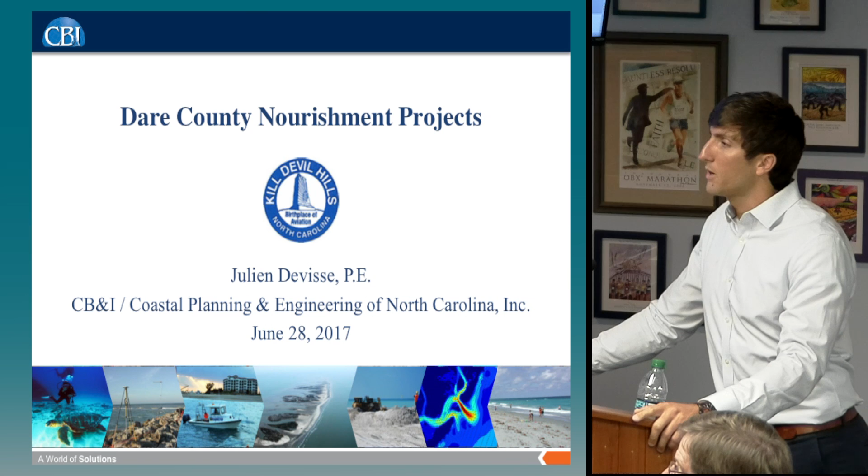Thank you, I'm glad to be here. Like Mayor Davey said, Great Lakes started pumping sand in Kill Devil Hills on the 22nd, last Thursday around 6 p.m., with the Liberty Island. Before they were in Duck, they had 3 dredges on site, or they still do. That's the Liberty, the larger one in Kill Devil Hills, and then there's 2 smaller dredges still working in Duck, and they should be done in Duck sometime this evening or tomorrow morning.

So we'll have those other 2 dredges at the south end of Kill Devil Hills near Landing Street as early as tomorrow morning. That'll be nice to see, and we'll touch on the schedule adjustment and what led to that. The main reason is because those 2 smaller dredges are here, so I'll have a couple slides to show to talk about that.

A little bit of background, like we're talking about now. We'll go over some of the background and equipment, look at the construction plans, the 4 subline locations for Kill Devil Hills, and a lot of those aerials we were just talking about, and then the schedule. Just a reminder of what to expect moving forward, monitoring, renourishment, and then some questions.

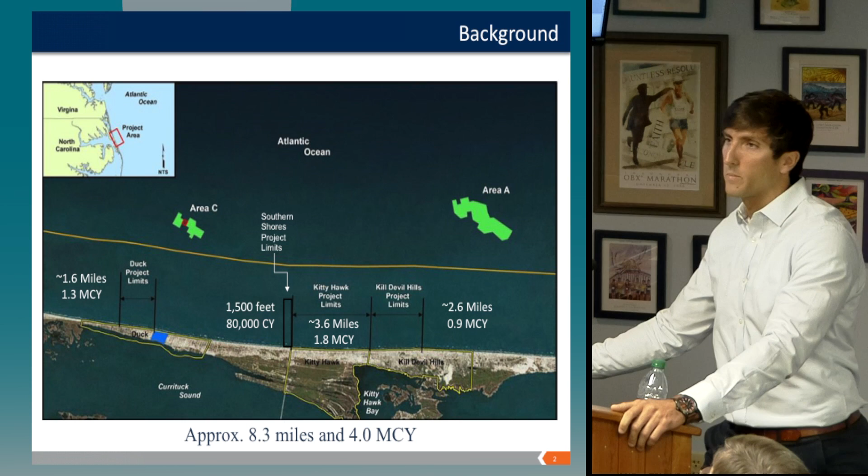So here's our project overview map. Those 2 green areas are our borrow areas. For Kill Devil Hills, it'll be coming from borrow area A, on the right of your screen. There are 4 towns; Southern Shores is included too now at 1,500 feet. So in total, we're about 8.3 miles and 4 million cubic yards.

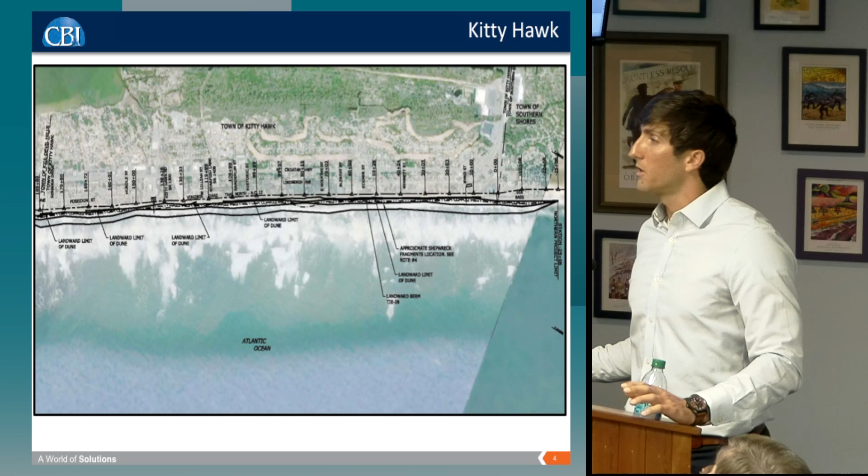There are 4 possible dredges that will be here. There are 3 on site right now. Like I said, the Liberty has started at Helga Street and is moving north. The Dodge and the Padre will be starting tomorrow, this evening, at Landing Street and heading south. And the Ellis Island may possibly show up later in the project, but that would be more for Kitty Hawk.

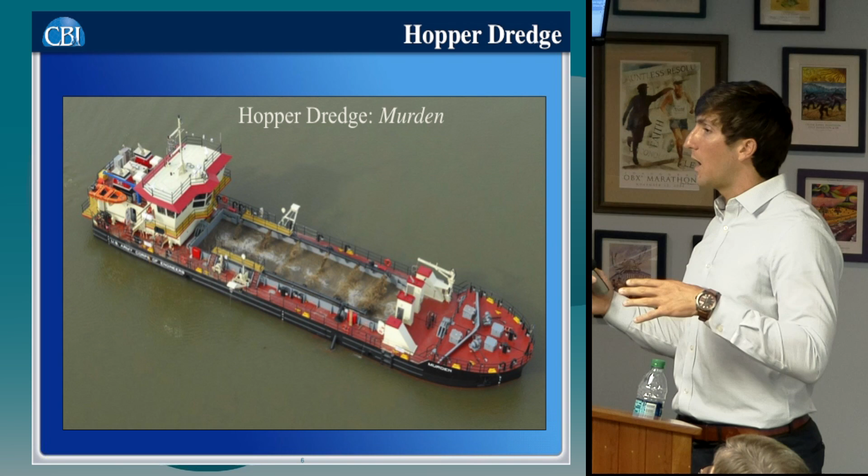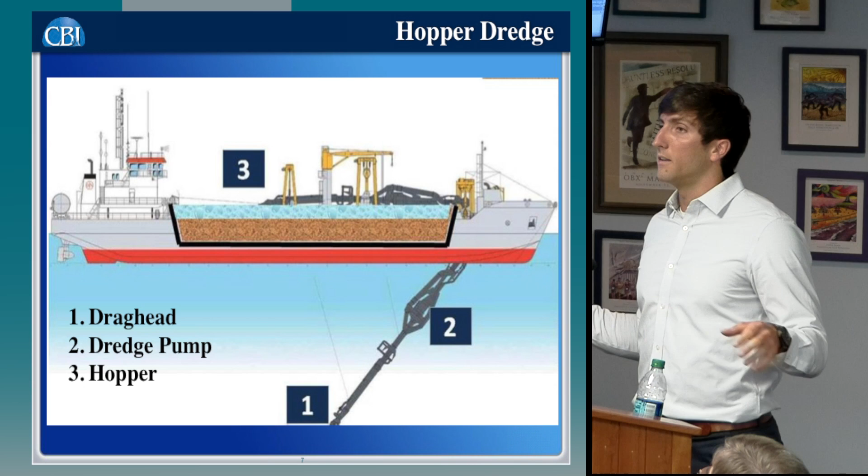This is a typical hopper dredge. This one's actually Army Corps, but you can see looking at the top how they're filling up their hopper. They go to the borrow area, fill up the dredge, and come back and discharge, and that's what you see offshore. This is your typical side view, with that material and water filling up the hopper. You have your drag heads on each side being dragged on the bottom, and those are kind of the vacuum cleaners that fill up that ship and then bring it back.

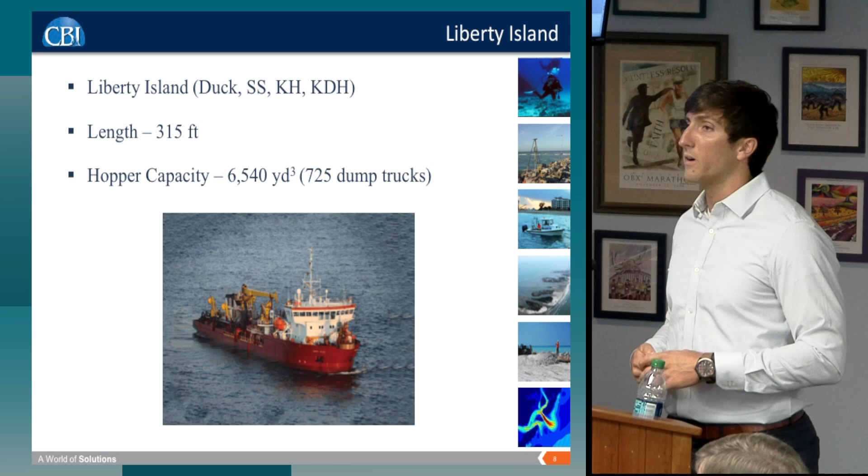This is the Liberty. It's larger than the Dodge and the Padre. It holds about 725 dump trucks worth of sand, whereas the 2 smaller dredges, the Dodge and the Padre, hold about 400. So they typically work in tandem. They're a little smaller, hold less, and keeping that distance down for them to travel is really important so that they're continuously pumping.

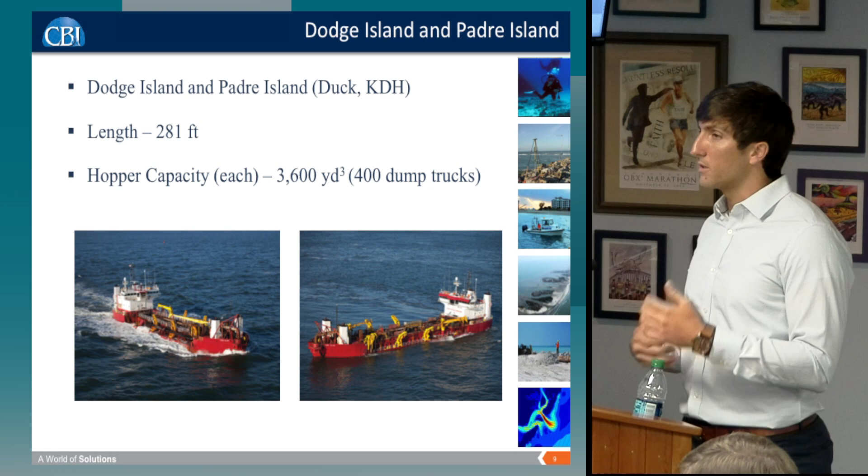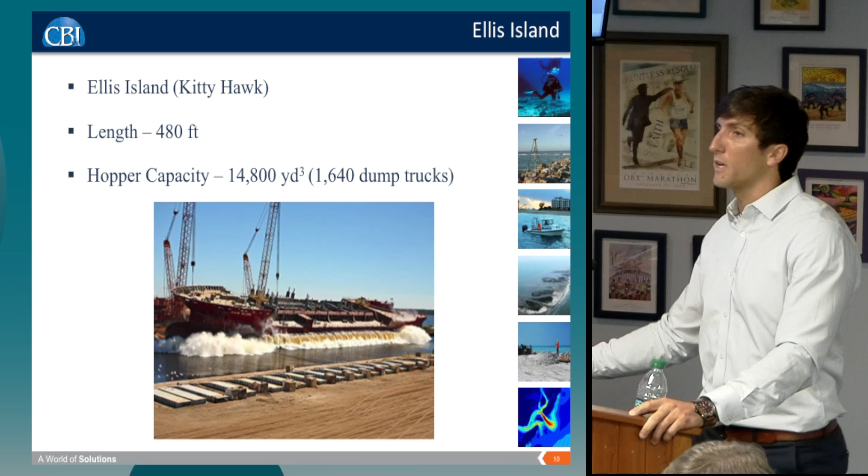This is the Ellis, which would be over 1,600 dump trucks, and that may come in August, but that would mostly be for Kitty Hawk at this point. It was supposed to be working on Kill Devil Hills, but because of that schedule shift, it'll now be more for Kitty Hawk if it does come.

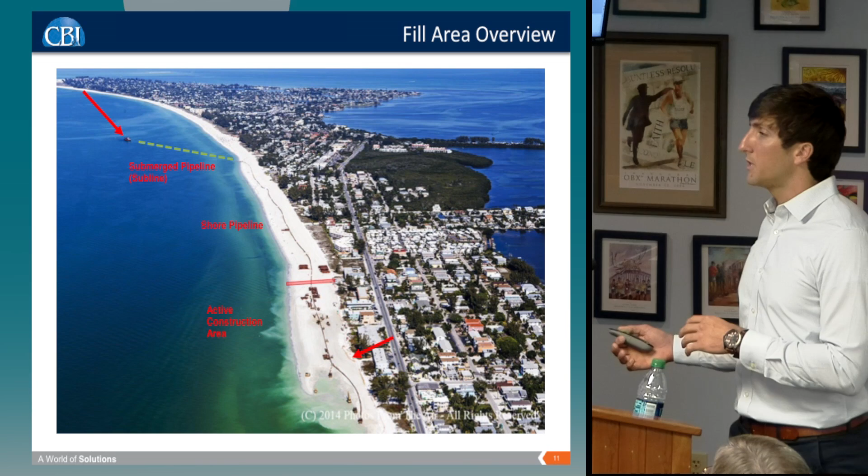This is typical of what we see, more of a generic view. That red arrow at the top left, that's the pump out station. You'll see the dredge just offshore, that's what it hooks up to. There's a subline, a submerged pipeline that leads to your shore pipe, which runs down the beach, and then you get into your active construction area.

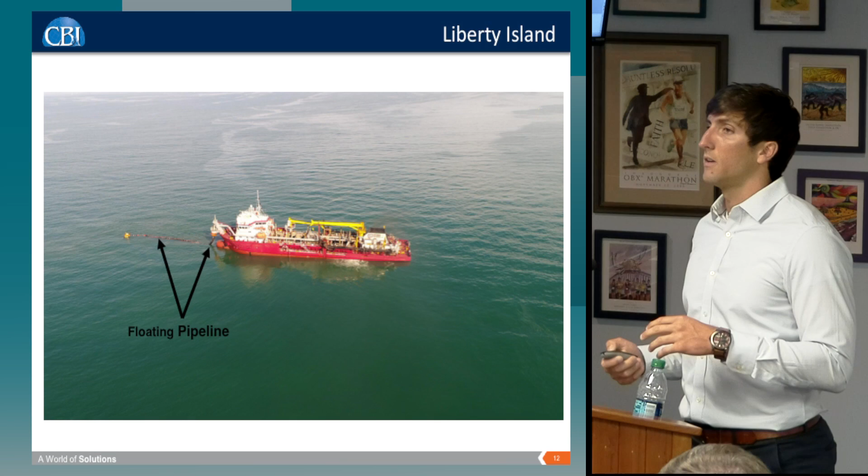So those were more generic. This is photos from Duck here. You have Liberty Island hooking up to your floating pipeline out there, about 3,000 to 5,000 feet from the shore, and that connects to the submerged pipeline, which comes onshore, which we'll see here. This is a view just looking from the beach; you have the dredge in the background, your submerged pipeline coming onshore.

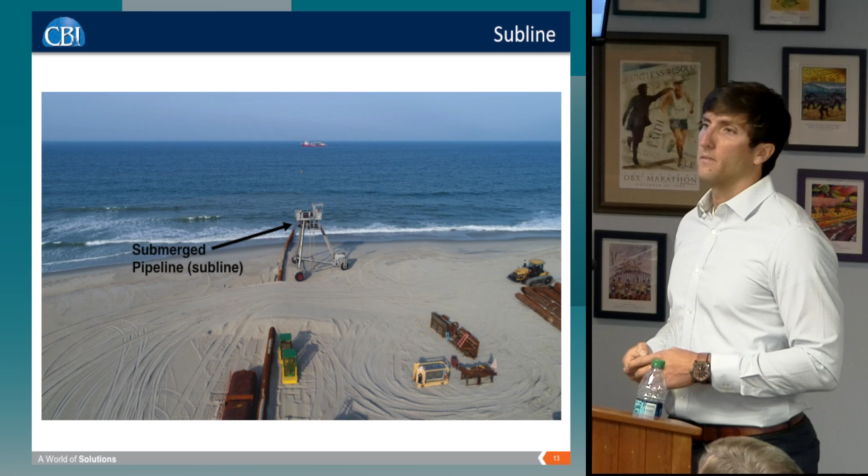I lost the clicker. Okay, because people are playing. Let me try again. All right, I think it started over.

There we go. And so then we get into our active construction area. I know that's a little small.

So our submerged pipeline comes onshore, then you have your shore pipeline, which is just the 30-foot sections of pipeline on the beach. And then you have a Y valve, where you split those shore pipelines so you can discharge from multiple areas as you go down the beach. You also have sand fencing on both sides, and that's the area closed to the public, the active area they're pumping into at that time.

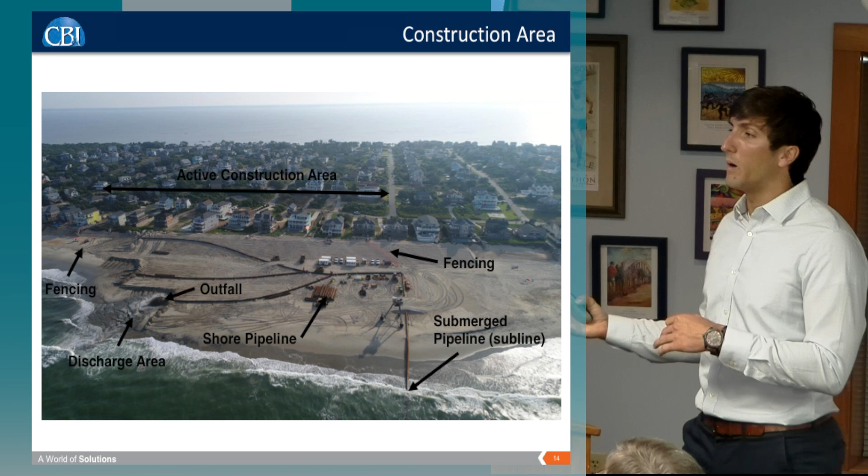Then they'll break down that shore pipeline, and once it's broken down, that Y valve will be moved up the beach, so now they have one line and can move the fence and reopen the beach. They'll keep moving down the beach until they hit a certain distance they can't pump anymore, and then they'll swap and head the other way.

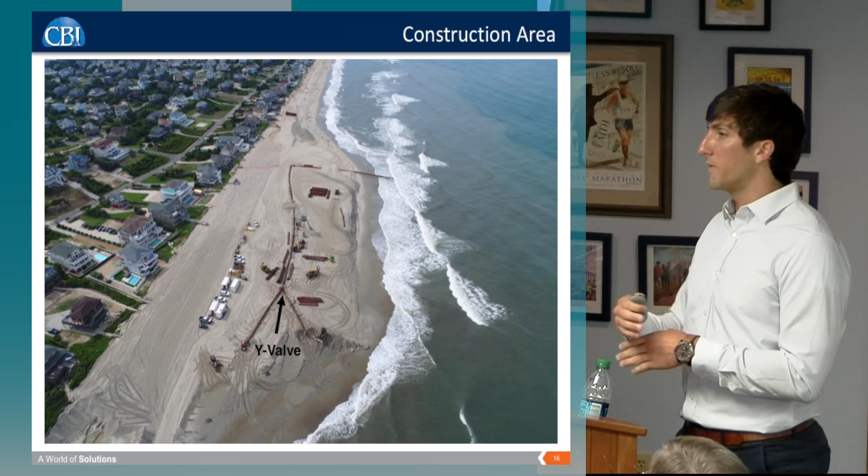So like at Helga Street right now, they're moving north into Kitty Hawk. Once they hit a certain distance that becomes inefficient, they'll go ahead and swap and start heading south from Helga Street.

Looking at the plans, just want to quickly touch on them. It runs from Prospect Drive to the Kitty Hawk, Kill Devil Hills line. What those plans show is we have a dune, our landward and seaward berm crest, and then where that template ties in.

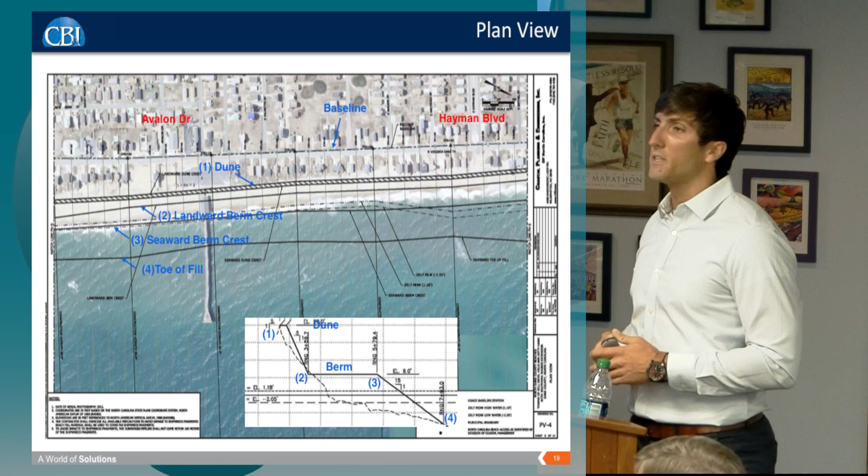And so you have your plan view at the top with this cross section - might be a little small to see, but that hatched area on the plan view is just the overhead view, that's the dune, and those other lines correspond to the cross section: the landward berm, the seaward berm, and then the toe of fill.

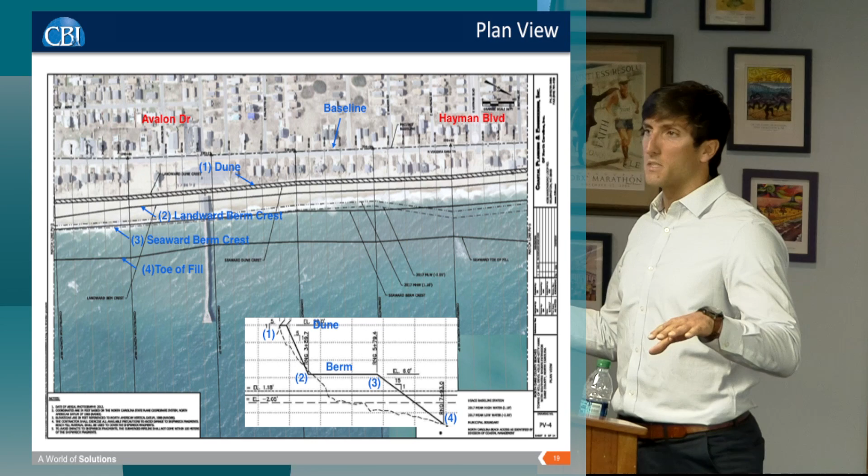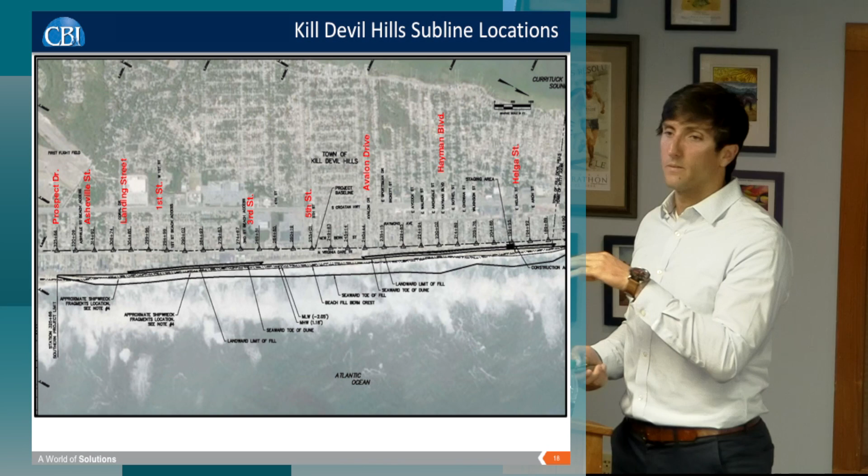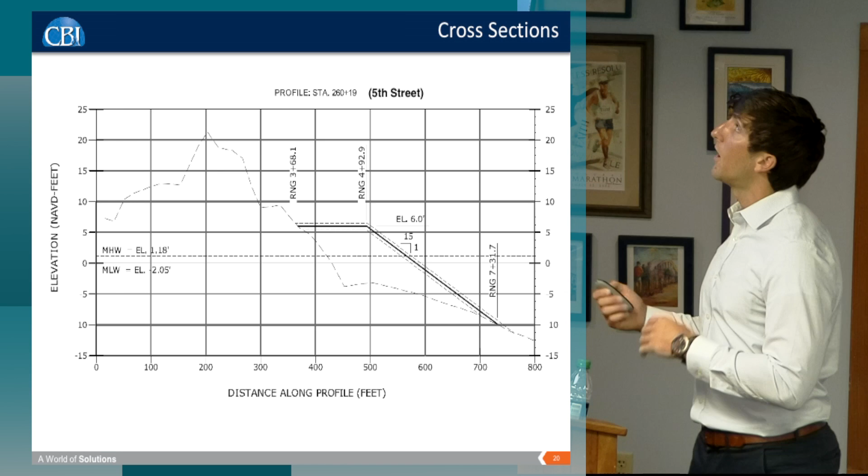And then in other areas, like between Landing and First, this is a 15-foot dune - the other one was 20 - and about 20 to 25 feet wide, compared to the other being 100 feet wide. So here it was important to build out that dune, and also the berm as well. That's why some areas do not have a dune - it just depends on the existing conditions and what was there before the project.

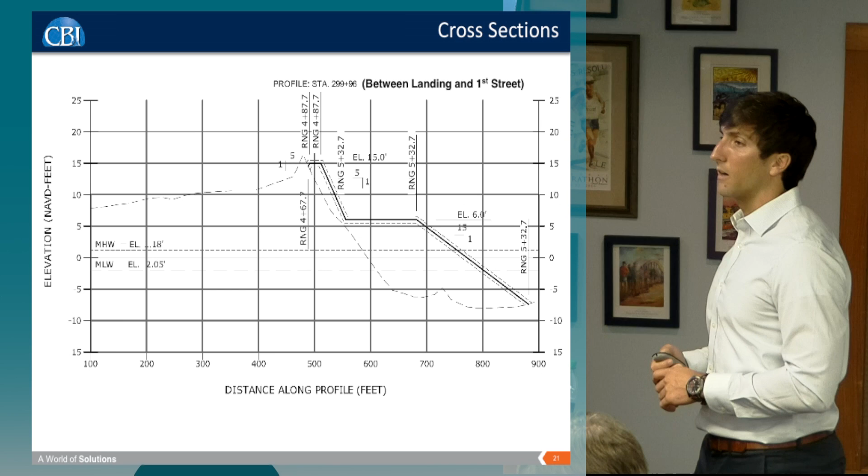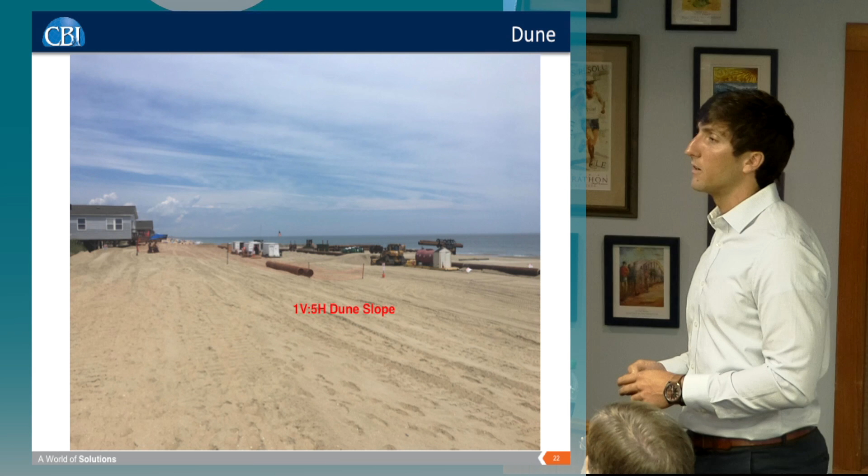And that dune slope - I know in the cross section it looks a little steep, but this is an actual constructed area near Helga Street. You can easily walk down, and in that picture there's a house, just to show you how they're tying into houses that are a little seaward in the design - kind of shaping it around those houses.

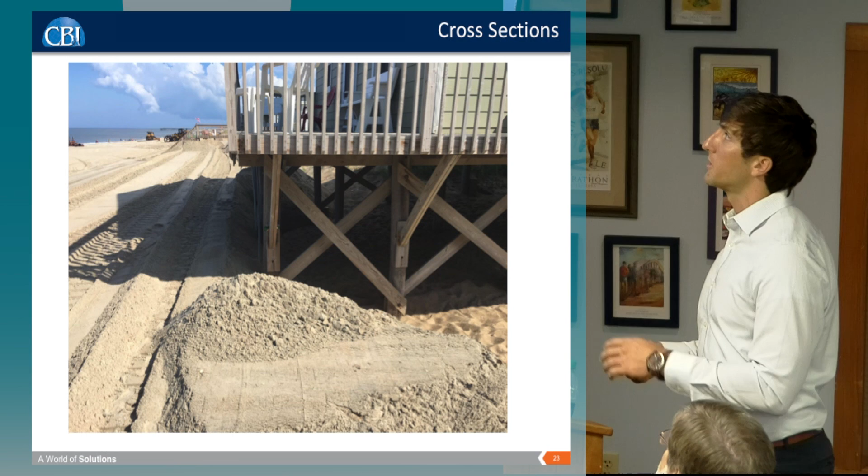The subline locations - there's 4 subline locations planned right now. Helga's obviously in, and they're pumping north, going about 1,500 to 2,500 feet into Kitty Hawk. This is because the distance at Duck that the dredge was hooking up at was about 5,000 feet, and this is closer to 3,000 feet.

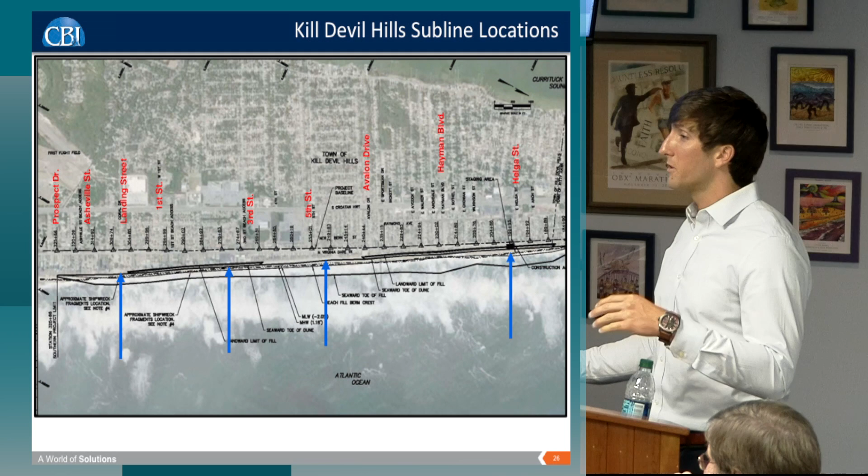They have a little more room to go on the beach, so they're adjusting and seeing how things are going - that's why right now they're still kind of analyzing best pump out efficiencies and everything. Right now they have one at Helga.

There's a pipeline installed at Landing Street, which is where the Dodge and the Padre are going to go. They're going to hopefully install another section just north of 2nd Street tomorrow. And then they'll have a 4th, which is the one that's at Duck now, and that should be sometime next week - that's going to go just north of 5th Street.

So right now, like I said, they're at Helga moving north. They're going to finish that portion and then flip and go south, again for as long as they can, depending on the efficiency of the pumps.

They also have the Dodge and the Padre starting at Landing, and they're going to move south and finish the taper. At that point, with the Dodge and the Padre, they'll be here early July, maybe another 7 to 10 days. So depending on how long it takes them to finish that taper, they'll go ahead and flip and work as far north as they can before they leave.

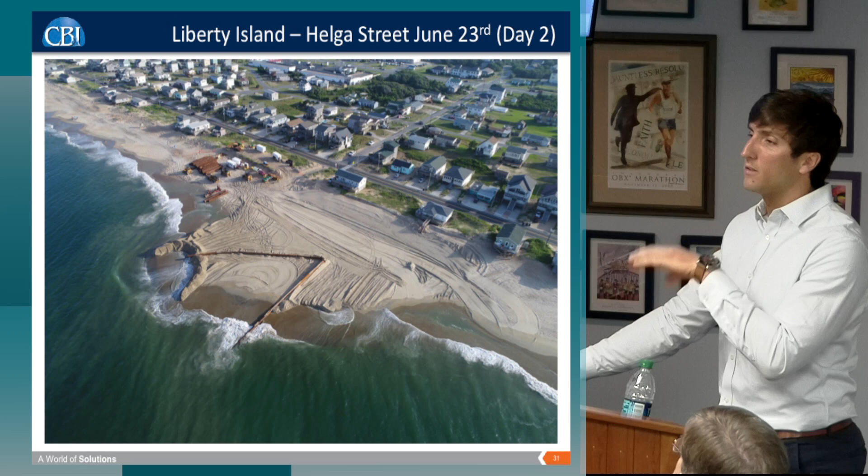So, and yeah, some photos - this is Helga. You'll notice they have some equipment near the dune, that's actually the staging area for this project. They also have additional equipment on the beach - hard to tell there, but this is kind of 24 hours into them pumping right at Helga Street.

Schedule. Just to touch base on why Kill Devil Hills ended up going before Kitty Hawk - those smaller dredges, the Dodge and the Padre, were not anticipated to be on this project at all. So once they showed up, it became let's maximize their efficiency.

Because they're smaller than the Liberty, a larger sail distance really affects them. From borrow area A to the center of Kill Devil Hills is about 6 miles, but to the center of Kitty Hawk is about 8 miles. So it simply became, while those 2 dredges are here, let's maximize their efficiency. That's why those 2 are starting at the very south end of Kill Devil Hills, to even make it closer to 5 miles.

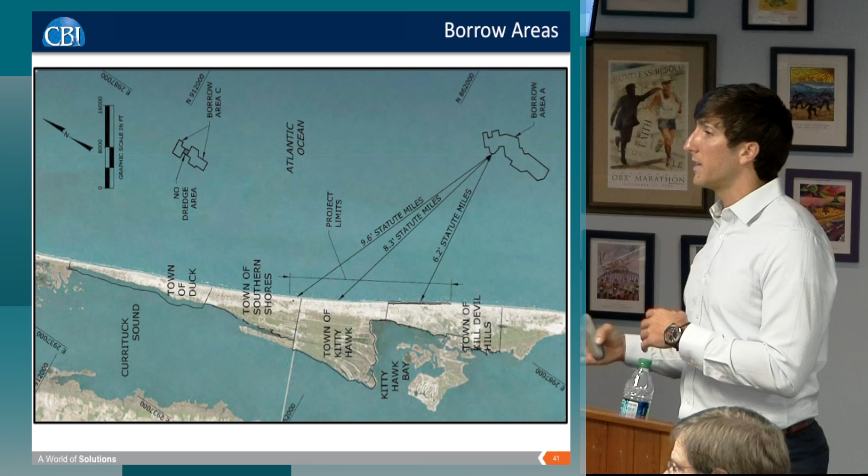We try to inform everyone as much as possible, but things just change. At the end, it's always for what's best for the project - what's going to get us out of here, or them out of here quickly, out of your guys' way, build the beach and be gone. We realize it's the summer, and there's a lot of decisions that continuously are made, but they're made to just maximize the project and be as efficient as possible.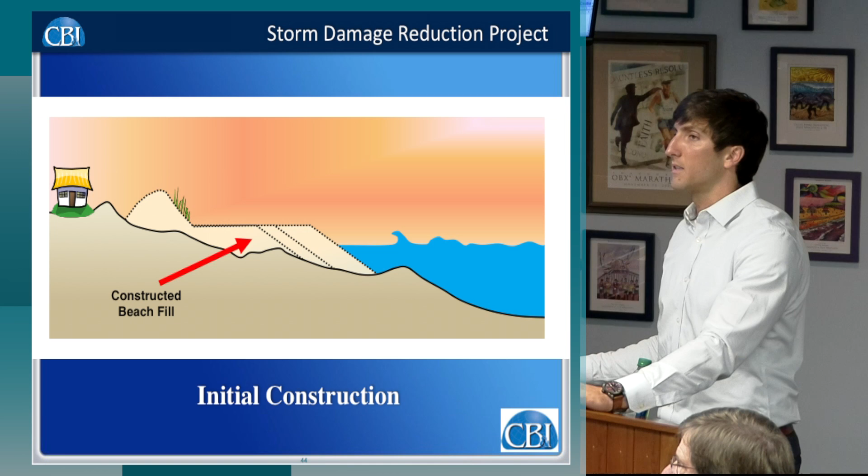You have your equilibration that's expected, so when you fill this template, you're not just filling the dry beach. It's like an iceberg - you see the tip, but there's so much more going on, and it's the same with the beach profile. You have the sandbar, you have all of it, and that sandbar is knocking down those waves - you need to nourish the entire profile.

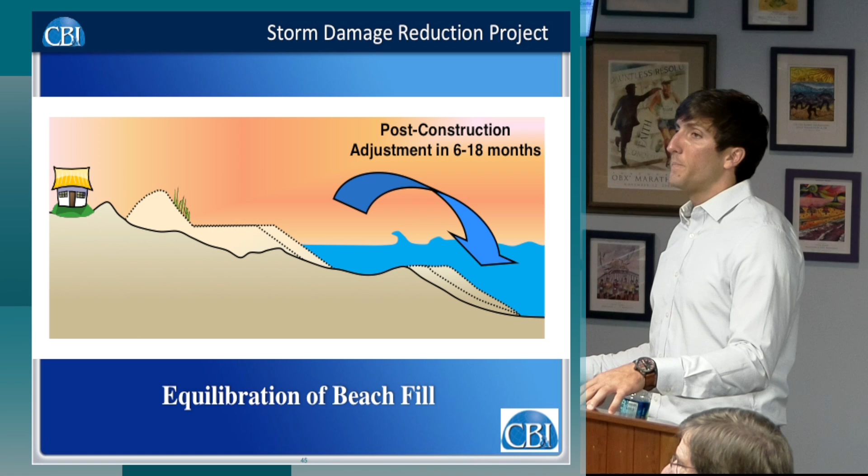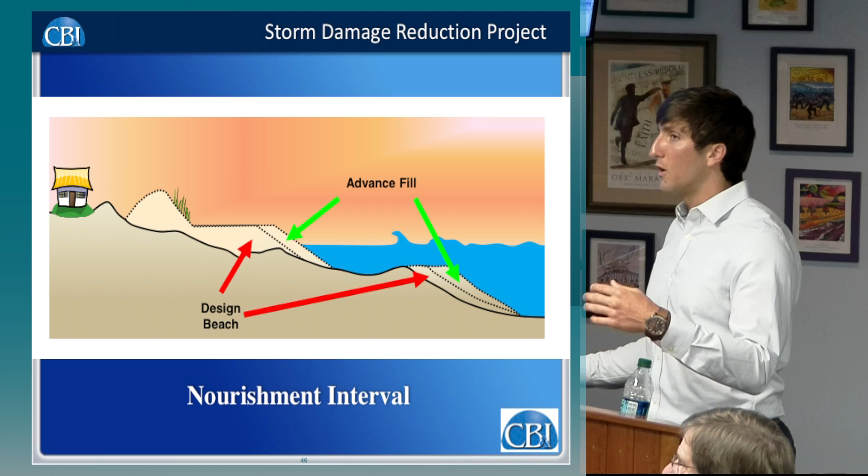In your construction template, you factor that in, that it's going to equilibrate, and you're going to see 30 to 40% of that equilibrate. Then you also have your advance fill, which is essentially you design for a certain nourishment interval, and then you go ahead and put your expected erosion on top of that - that's kind of sacrificial fill that over time does erode. Then you have what's left, your design beach, which is the minimum protection you want to provide. Once you've hit that design section, then you go ahead and re-nourish.

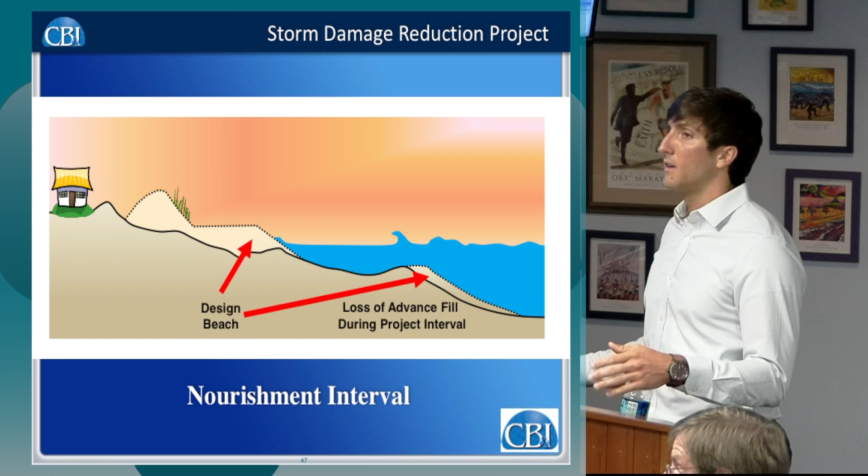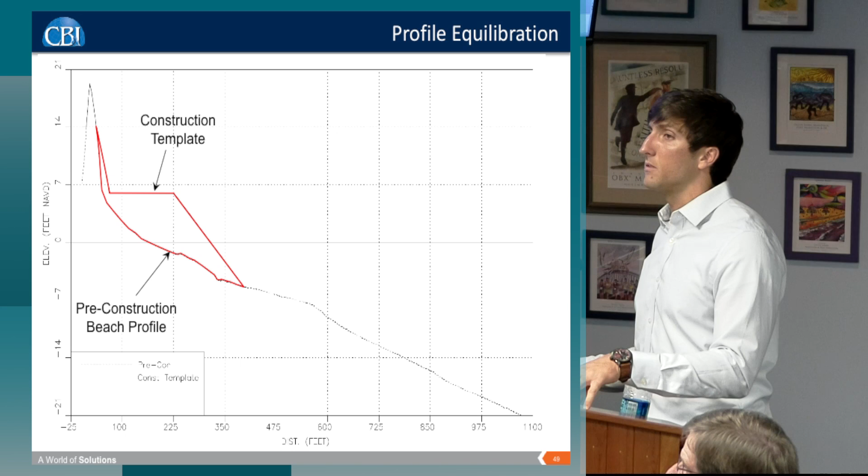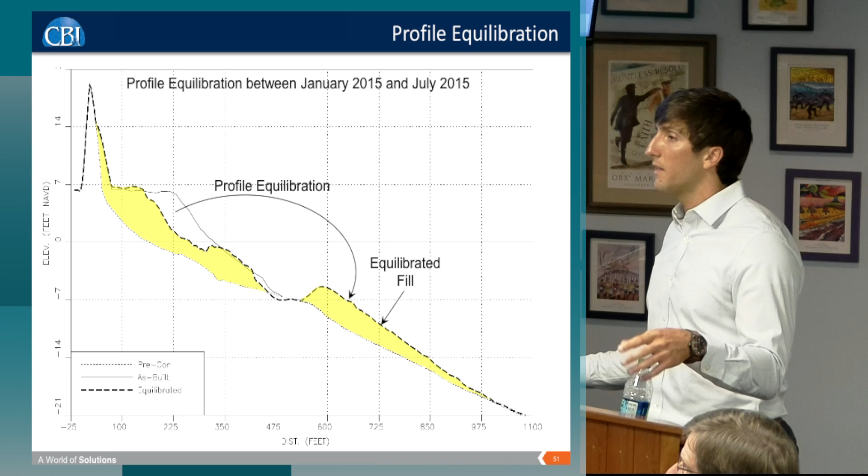At first we're going to see, especially recently, some equilibration of those profiles. This is a real-world example from North Topsail from a couple of years ago. Here we have our construction template - what was constructed is yellow, and about 6 months into it, you can see a lot of that material moving near shore and building up that sandbar.

What that does is, before, a wave was breaking on the left of that arrow, and now it's breaking farther offshore. So that wave energy is just dissipating over, in this example, 200 feet farther offshore. Not only do you have a wider beach, but you have smaller waves hitting that beach. But that's a process that's anticipated - it's factored into the construction template to equilibrate and fill the entire profile.

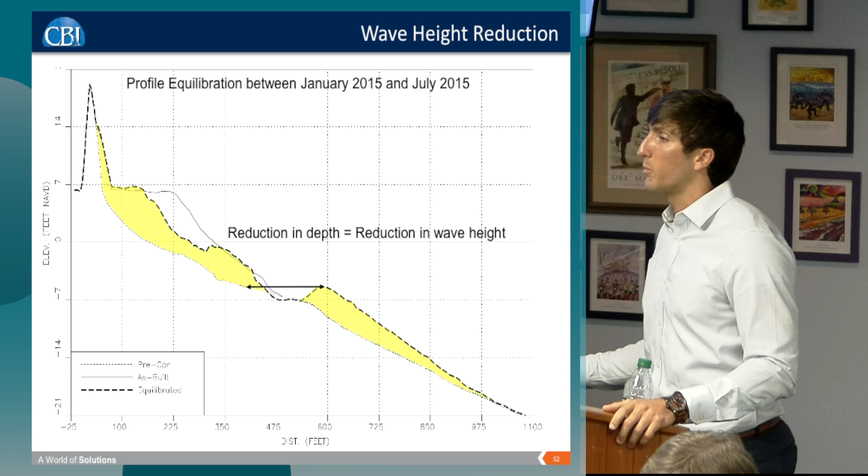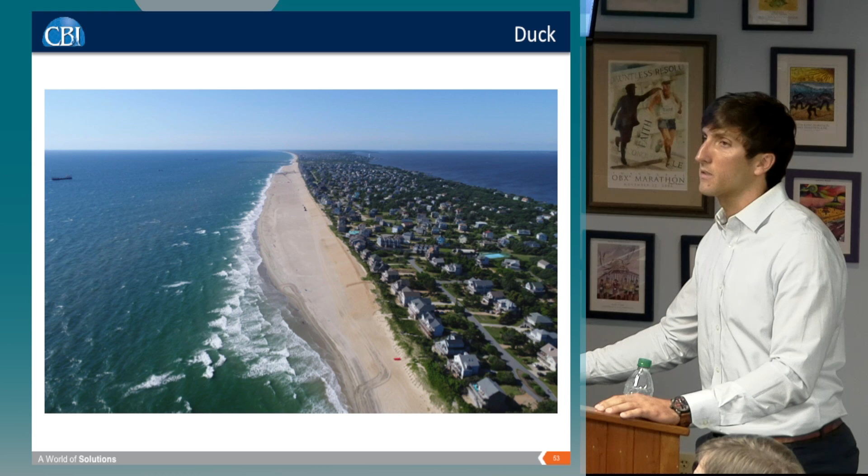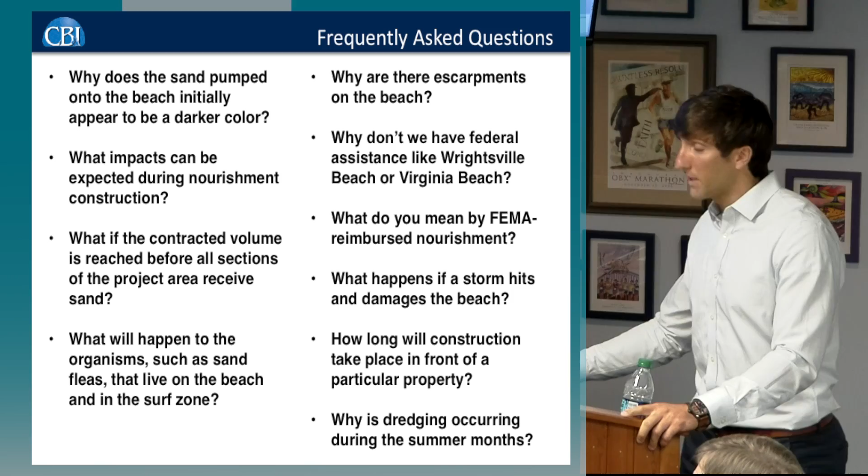I have some frequently asked questions, but I like to just leave them in the presentation for when you all post them, or if you'd like to ask them specifically, feel free to. But that's all I have - if anyone has some questions.